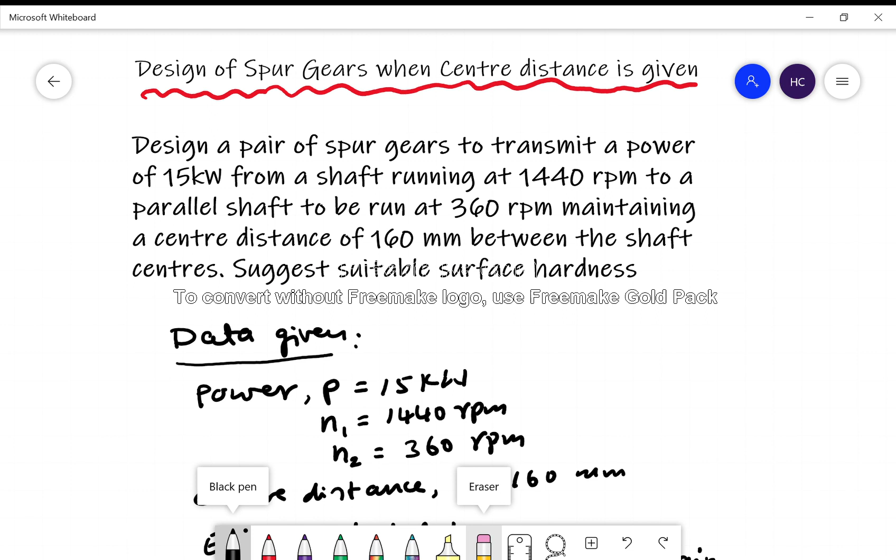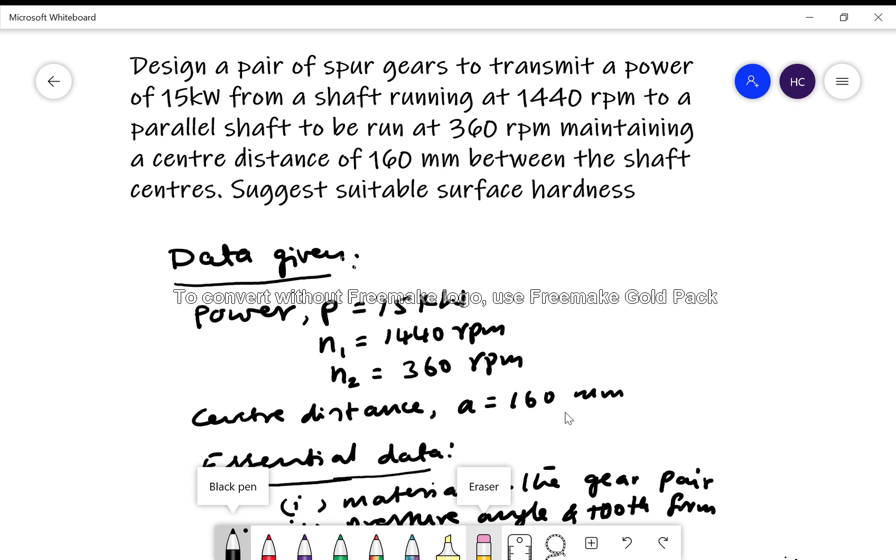Data given. Power P is equal to 15 kilowatt. Speed of pinion N1 is equal to 1440 rpm. Speed of gear N2 is equal to 360 rpm. And center distance A is equal to 160 mm. Center distance A is nothing but D1 plus D2 divided by 2.

So data required: material of the gear pair, pressure angle and tooth form, class of gears, type of load and service condition. Center distance is given. We are not supposed to assume minimum number of teeth, that is teeth on pinion.

So now let us select material for the pinion as cast steel, 0.2% carbon, heat treated. Allowable static stress for this material is sigma D1 is equal to 193.2 Newton per millimeter square from table 12.7 on page 234, design data handbook by Professor K. Mahadevan and Professor K. Balaveera Reddy, 4th edition.

And the gear material we have chosen is cast steel, that is also 0.2% carbon, untreated. So the allowable static stress for which is 138.3 Newton per millimeter squared. It's always better to choose high strength material for pinion. If pinion and gear are made of same material, then pinion is weaker. So hence you have to design based on pinion.

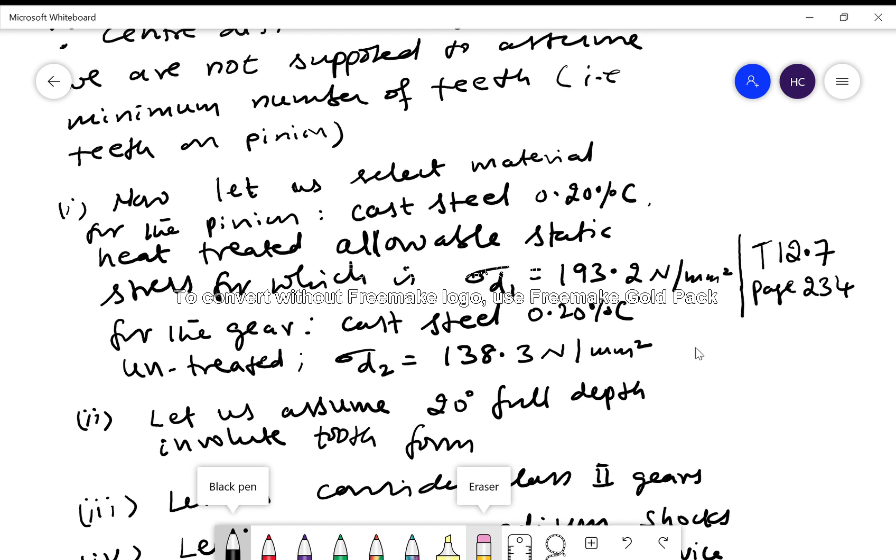So now let us assume 20 degree full depth involute tooth form, and let us consider class 2 gears, and let us assume medium shocks and 8 to 10 hour per day service, for which service factor is 1.5 from table 12.8 page 235.

Sometimes in the examinations they'll give starting torque is greater than rated torque. Say sometimes starting torque is 20% greater than the rated torque, or 50% greater than the rated torque, like that. So sometimes they'll say starting torque, sometimes they say maximum torque. So sometimes maximum torque is 1.5 times the rated torque, like that they give.

So that's 1.5 times, or 20% means 1.2. Okay, so that is nothing but a service factor. So once in the question they mentioned this, you need not take CS once again. Okay, that itself is a CS.

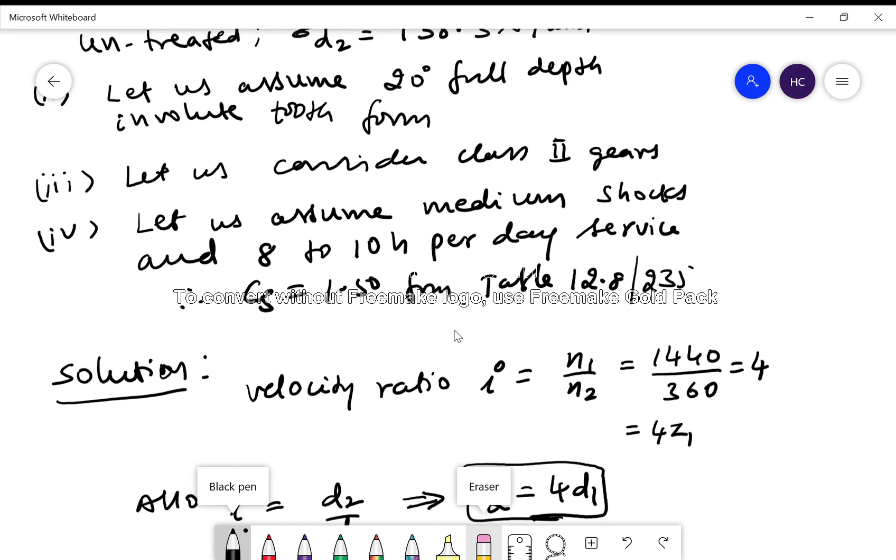Solution. So velocity ratio I is equal to N1 by N2, that's equal to 1440 divided by 360, that's equal to 4. And we have I is also equal to Z2 by Z1. Therefore, Z2 is equal to 4Z1. So in terms of pitch diameters, we have I is equal to D2 by D1. Therefore, D2 is equal to 4 times D1.

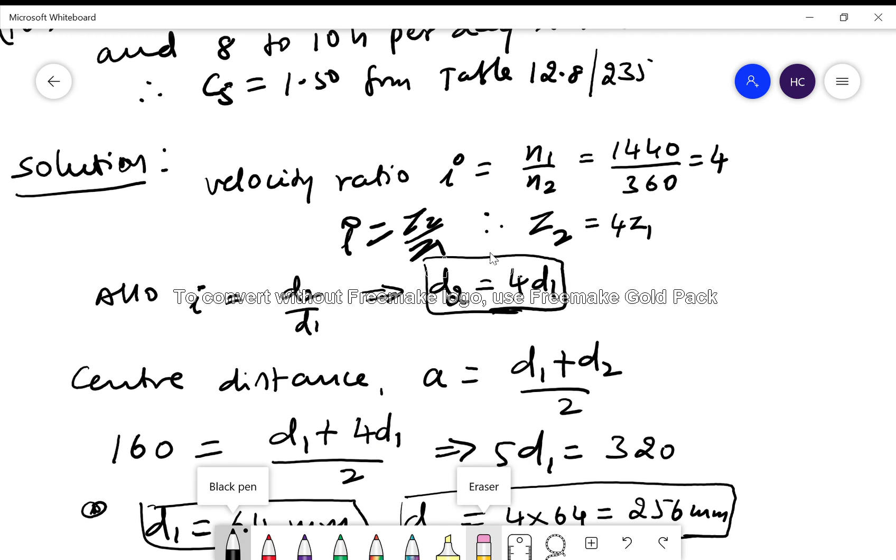Because I is 4. So now center distance is given as A is equal to d1 plus d2 by 2. So for A we have substituted 160 mm, d1 we have written as it is, and for d2 we have substituted 4d1. So now d1 plus 4d1 is 5d1. 5d1 is equal to 160 into 2, that is 320. So from which we obtain d1 is equal to 64 mm and d2 is 4 times d1,

that is 256 mm. Also we know that number of teeth z is equal to d by m, pitch diameter divided by module. So therefore z1 is equal to d1 by m, that is 64 by m. Similarly z2 is equal to d2 by m, that is equal to 256 by m.

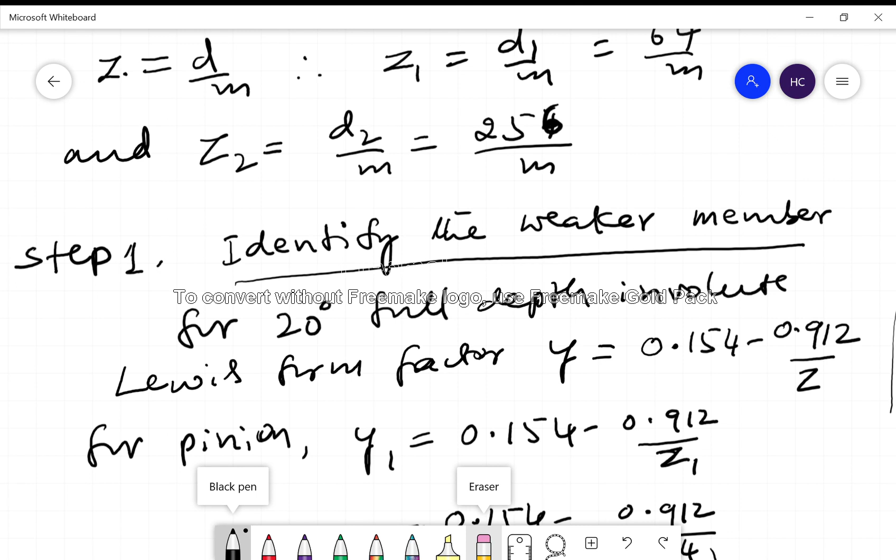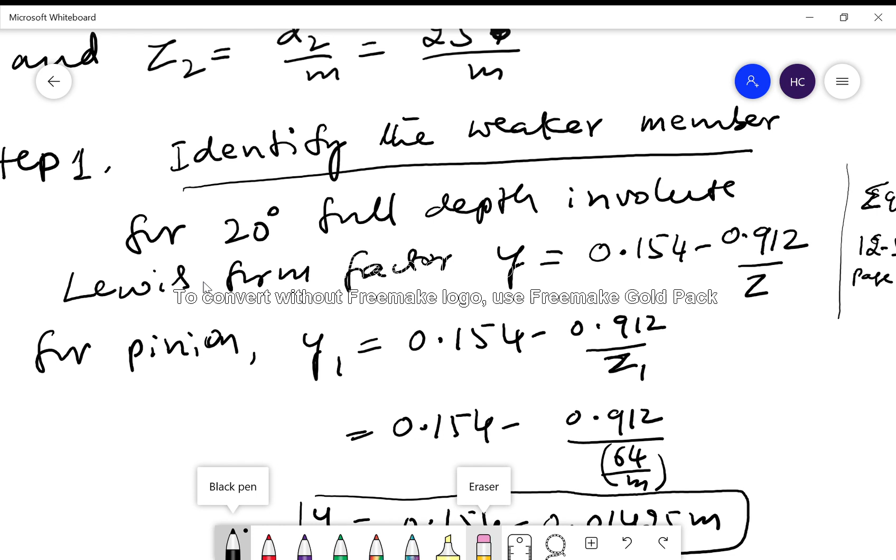So now step 1 is to identify the weaker member. For 20-degree full depth involute system, Lewis form factor y is given as 0.154 minus 0.912 divided by z. For pinion, we use the suffix y1. 0.154 minus 0.912; for z1, we have substituted 64 by m because z is d by m. So we get y1 is equal to 0.154 minus 0.01425 m.

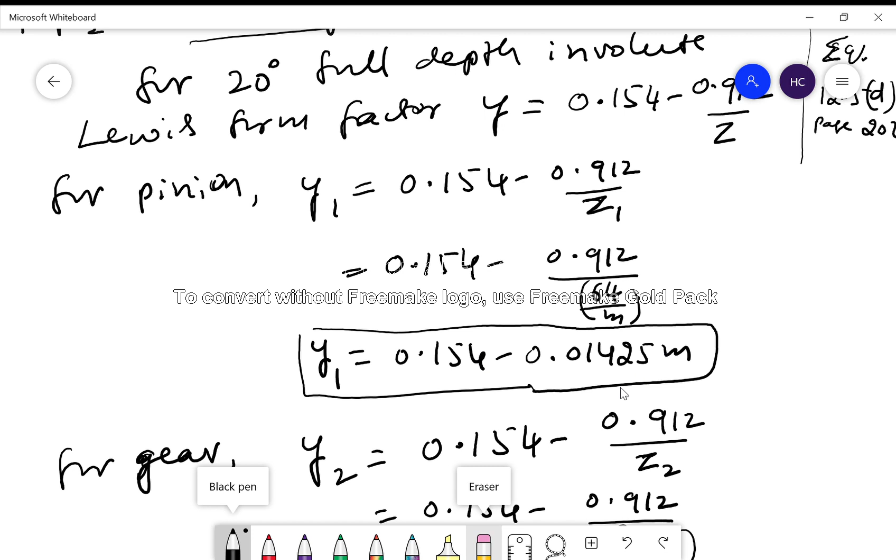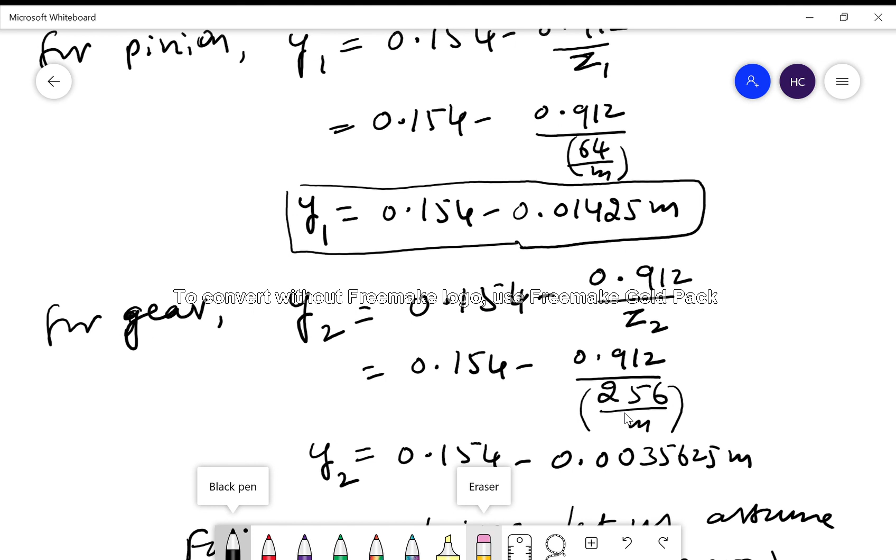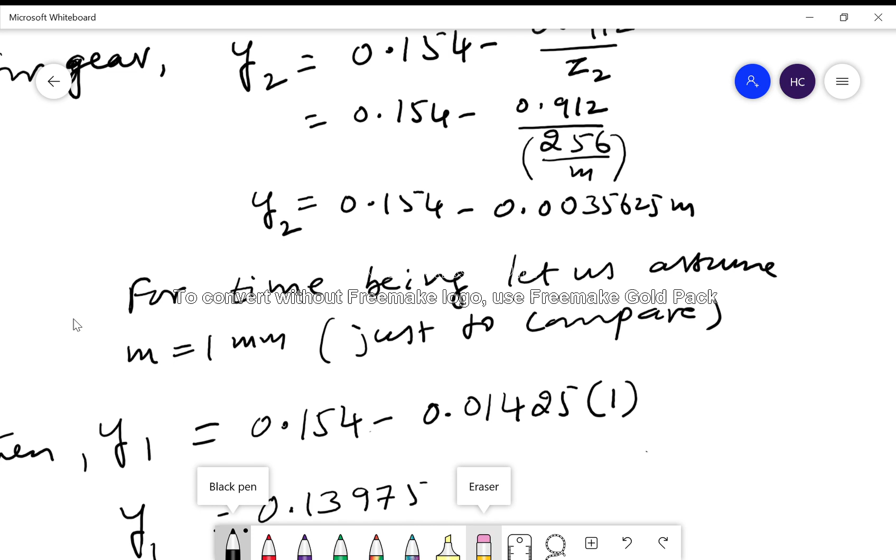For gear, y2 is equal to 0.154 minus 0.912 by z2. For z2 we have substituted 256 by m, that is d2 by m. So now we get y2 is equal to 0.154 minus 0.0035625 m. For time being, let us assume module m is equal to 1 mm. Just to compare, okay, just to identify the weaker member. So let us assume m is equal to 1 mm.

So now after substituting module m is equal to 1 mm, we get y1 is equal to 0.13975 and y2 is equal to 0.1504. So now in order to identify the weaker member, we want sigma d1 y1 and sigma d2 y2. So for sigma d1 y1, sigma d1 is 193.2 and y1 is 0.13975. So we get 26.9997 Newton per millimeter squared.

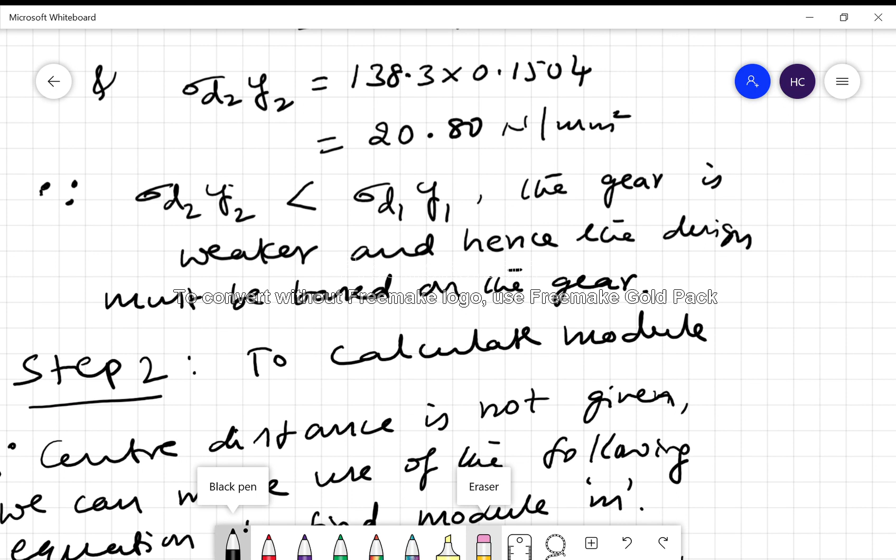For sigma d2 y2, sigma d2 is 138.3, that is allowable static stress for gear material, and y2 is 0.1504, so gives us 20.8 Newton per millimeter squared. So now we see that sigma d2 y2 is less than sigma d1 y1. Since sigma d2 y2 is less than sigma d1 y1, the gear is weaker and hence the design must be based on the gear.

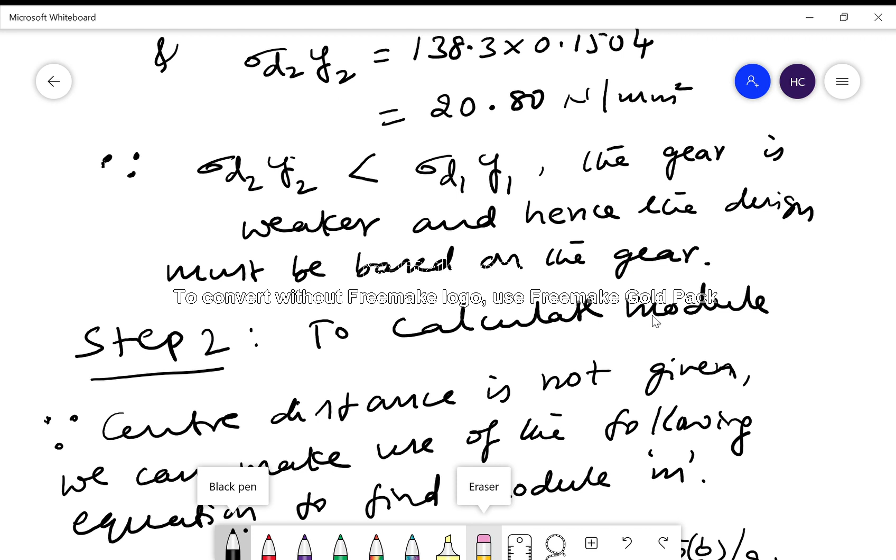Step 2, to calculate module. Since the center distance is not given, we can make use of the following equation to find module m. That is, m is equal to square root of Ft by sigma d Cv k into capital Y, equation 12.5b, page 204.

So here Ft is 1000 P Cs divided by V. So in order to find velocity, we have to make use of this equation. Because gear is weaker, pitch diameter of the gear and speed of the gear we have considered here. V is equal to pi d2 N2 by 60,000.

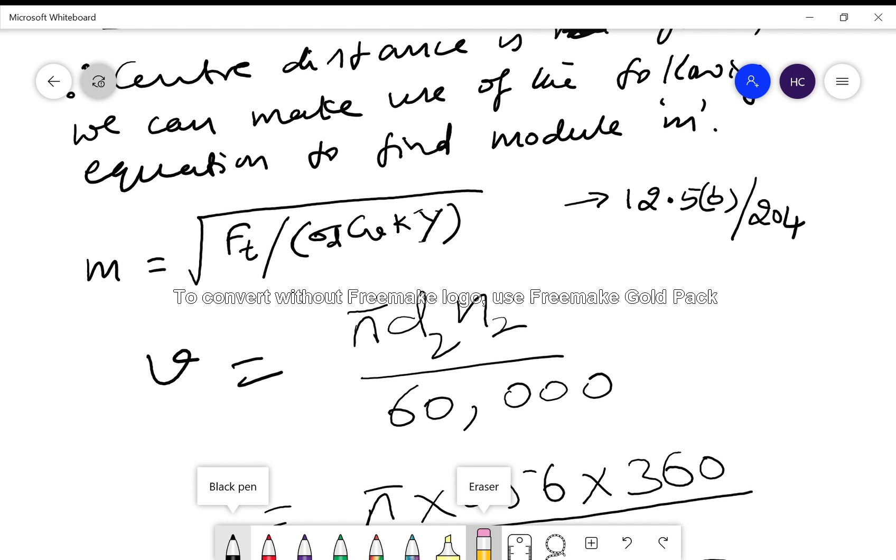Substituting d2 is 256 and n2 is 360, we get velocity V is equal to 4.825 meter per second. This velocity is less than 8 meter per second. Then using Barth's equations, we get velocity factor Cv is equal to 3.05 divided by 3.05 plus V, equation 12.6a, page 205. Since velocity is less than 8 meter per second, we are making use of this equation. So now we get Cv is 0.3873. For V, we have substituted velocity 4.825 meter per second.

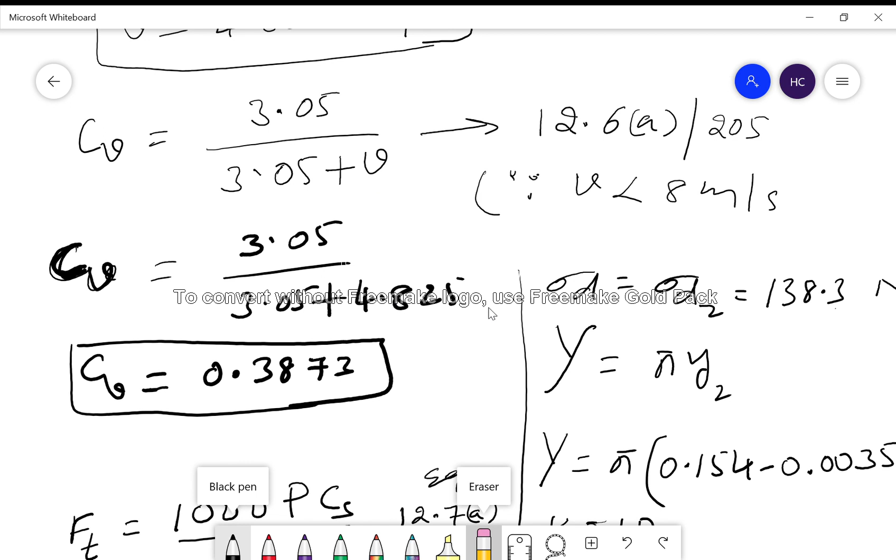Now Ft is 1000 P into Cs divided by V, equation 12.7a, page 205. Thousand into power P is 15, Cs is 1.5, we have assumed that. Velocity V 4.825. So we calculate 4663.21 Newton as Ft value.

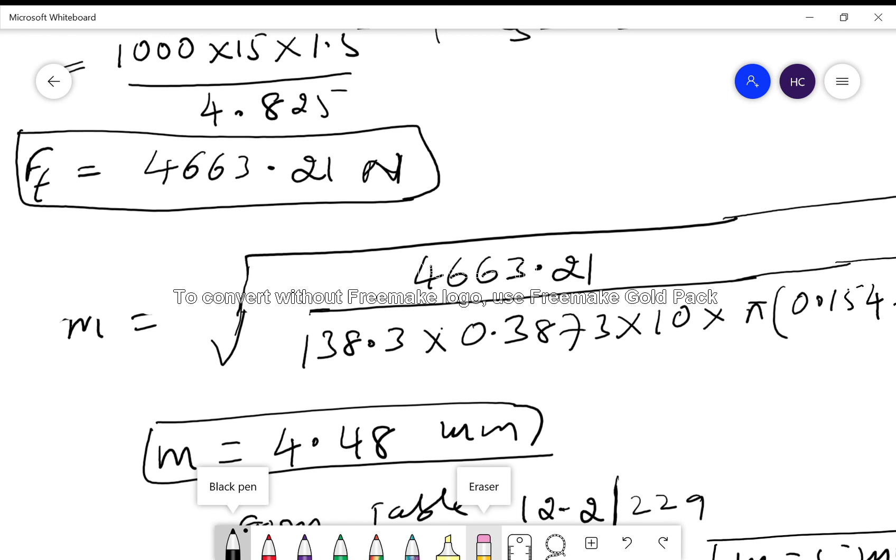Now, module M is given by Ft divided by sigma d Cv K into capital Y. So Ft we have substituted 4663.21. Sigma d is nothing but sigma d2, that is 138.3 Newton per millimeter square, and Cv 0.3873. K we have taken 10 because K is nothing but a ratio of B by M. So K is B by M. Therefore, K varies from 9.5 to 12.5. So we have taken K as 10. That's why we have substituted K is equal to 10.

Sigma d2 is 138.3 and capital Y is pi into small y. Small y is 0.154 minus 0.0035625 m. That is, y is nothing but y2 here in this case. Y2 is corresponding to the gear and Cs is 1.5. So now substituting those values here, we obtain module M is equal to 4.48 mm.

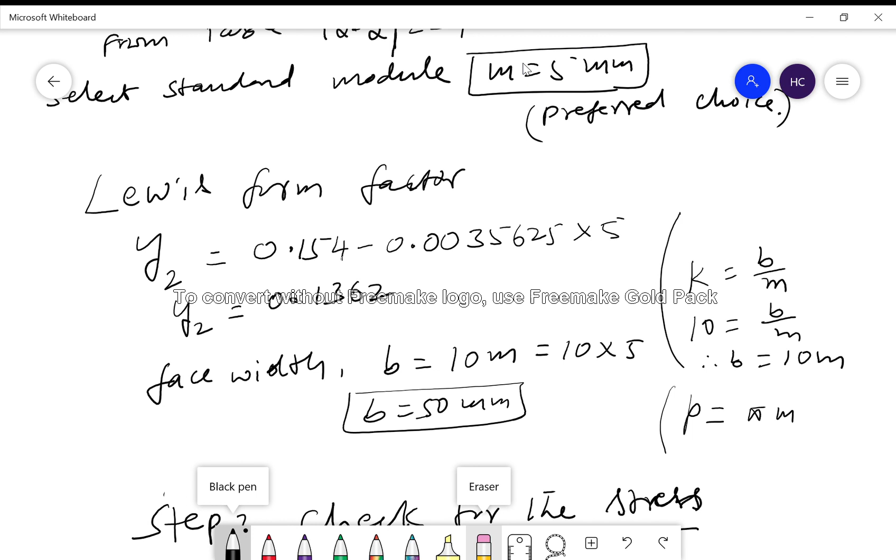Now find out Lewis form factor after substituting M value here. So you get y2 is equal to 0.1362. In table 12.2 page 229 we also have module 4.5 mm, which is greater than the calculated value 4.48, but it's preferred to take 5 mm only.

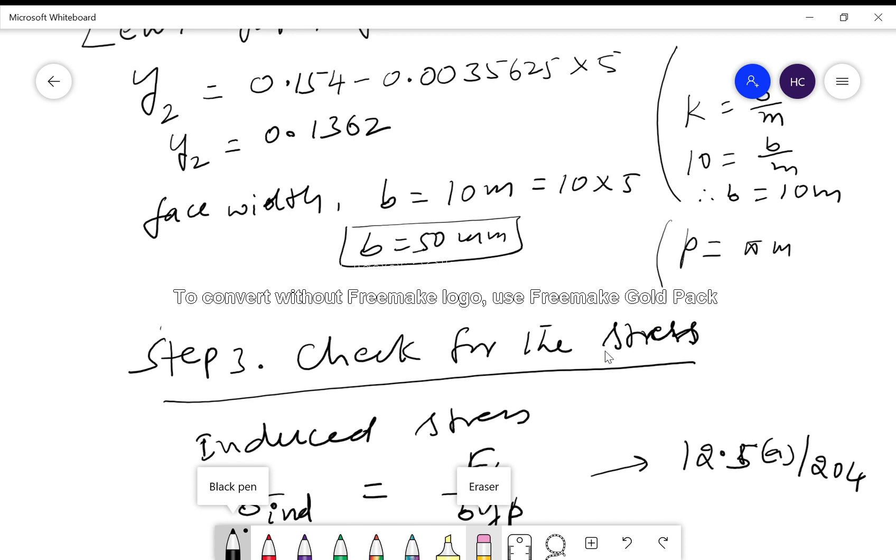It's a preferred choice. So now face width B is equal to 10 times the module, that is 10 into 5, B is equal to 50 mm, because K is equal to B by M, and K we have taken 10, therefore B is equal to 10 times module. And small p is the circular pitch, that is pi into M. Now step 3, check for the stress. Induced stress, sigma induced, is equal to Ft divided by B small y into small p, equation 12.5a, page 204.

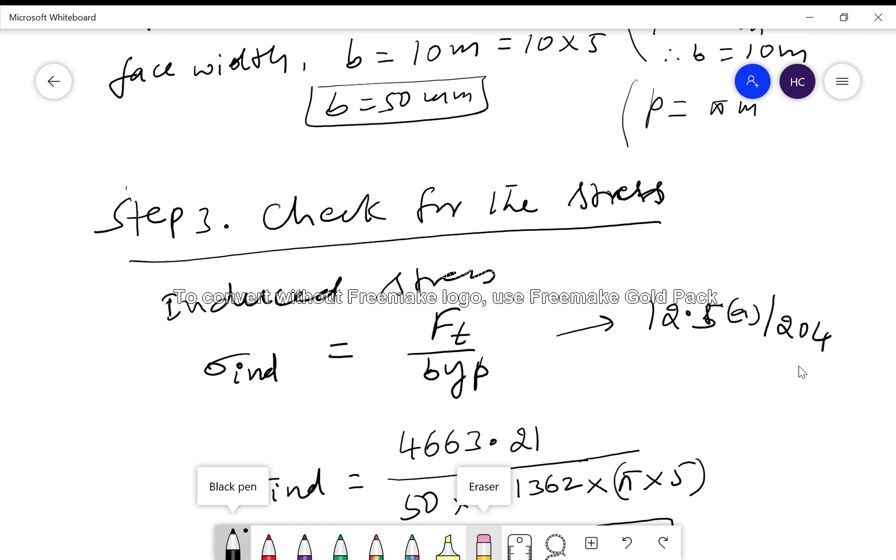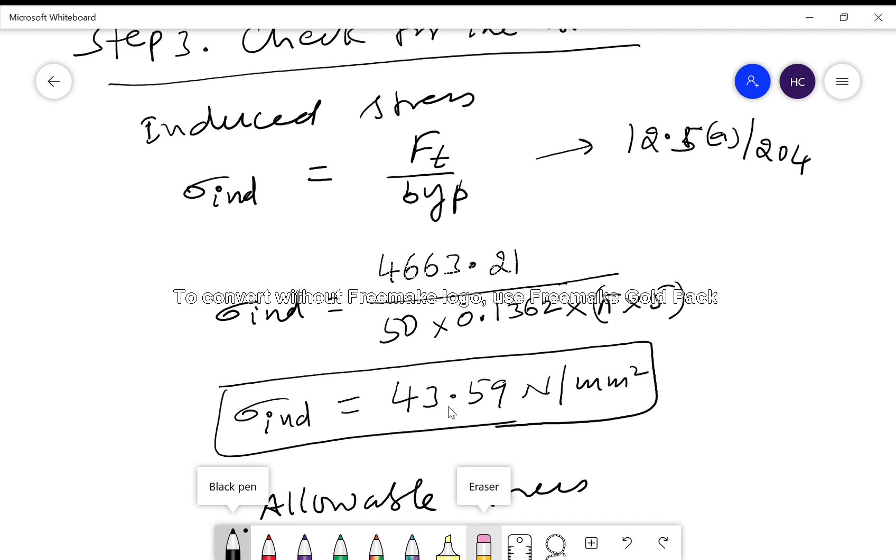So now we have substituted corresponding values and we obtained induced stress sigma induced is equal to 43.59 Newton per millimeter square. Now we need to calculate allowable stress. Sigma allowable is equal to sigma d into Cv. Sigma d here is nothing but sigma d2, that is for gear. So allowable static stress for gear material is 138.3 Newton per millimeter square, and Cv we have already calculated, 0.3873. So allowable stress is 53.56 Newton per millimeter square.

The allowable stress is 53.56 Newton per millimeter square. The induced stress is 43.59 Newton per millimeter square. Since induced stress is less than allowable stress, that is 43.59 is less than 53.56 Newton per millimeter square, the design is satisfactory. So let us find out FOS: sigma allowable divided by sigma induced, 53.56 divided by 43.59. So we get factor of safety is equal to 1.23.

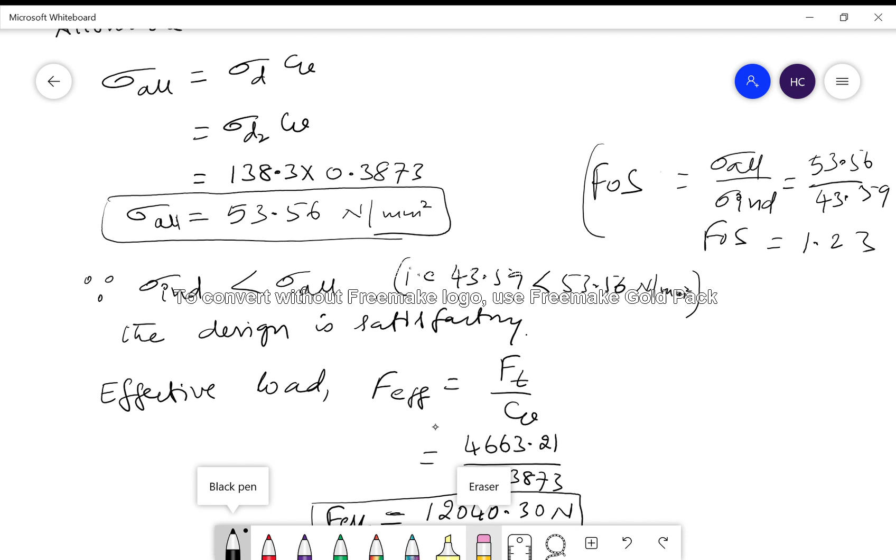So now find out effective load or effective force. F effective is equal to Ft by Cv. Ft is 4663.21 Newton, Cv is 0.3873. So F effective is 12,040.30 Newton. Next, calculate dynamic strength.

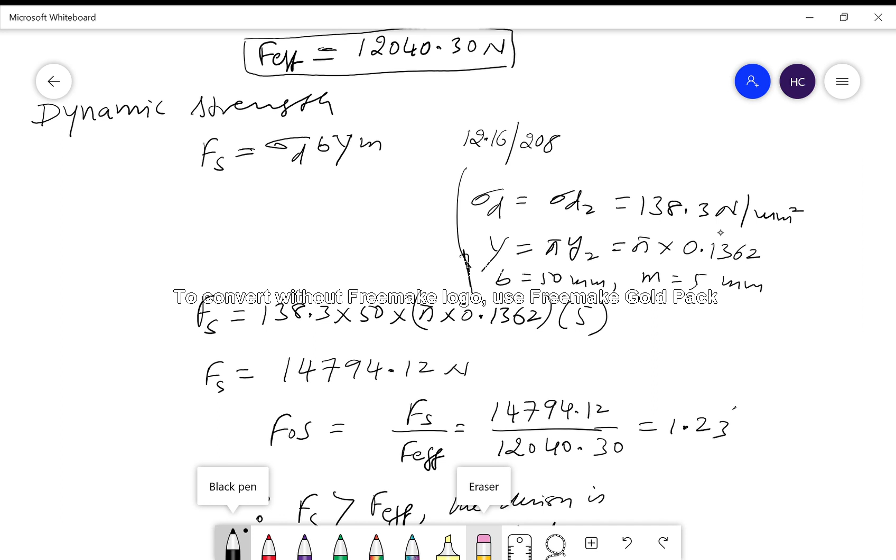Fs is equal to sigma d b capital Y into M. Sigma d is nothing but sigma d2, that's 138.3 Newton per millimeter square. This dynamic strength equation is 12.16, page 208. Capital Y is pi y2, so substitute y2 is 0.1362. After substituting, we obtain dynamic strength as 14,794.12 Newton. So factor of safety is dynamic strength divided by effective load. That gives us 1.23, same as the factor of safety obtained from the allowable stress and induced stress ratio. Since the dynamic strength is greater than effective force, the design is satisfactory.

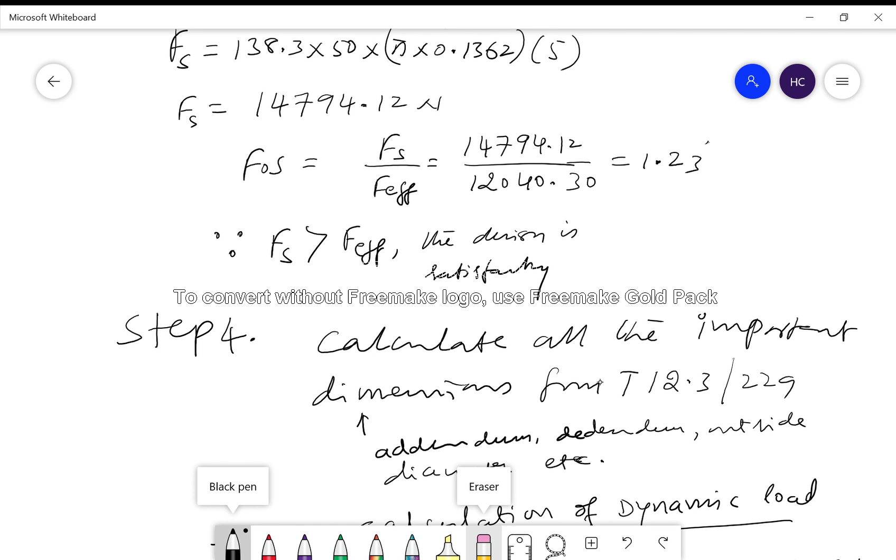Step 4. Calculate all the important dimensions from table 12.3, page 229. Important dimensions like addendum, dedendum, outside diameter, etc.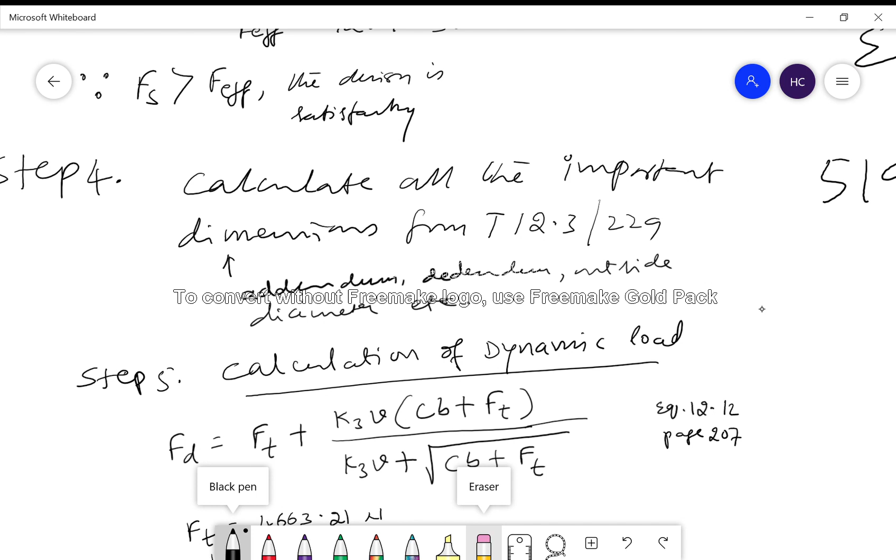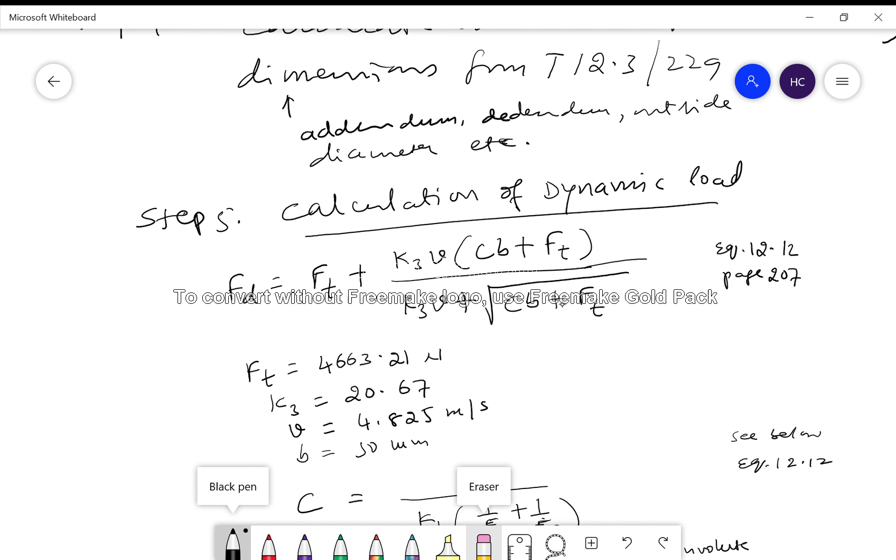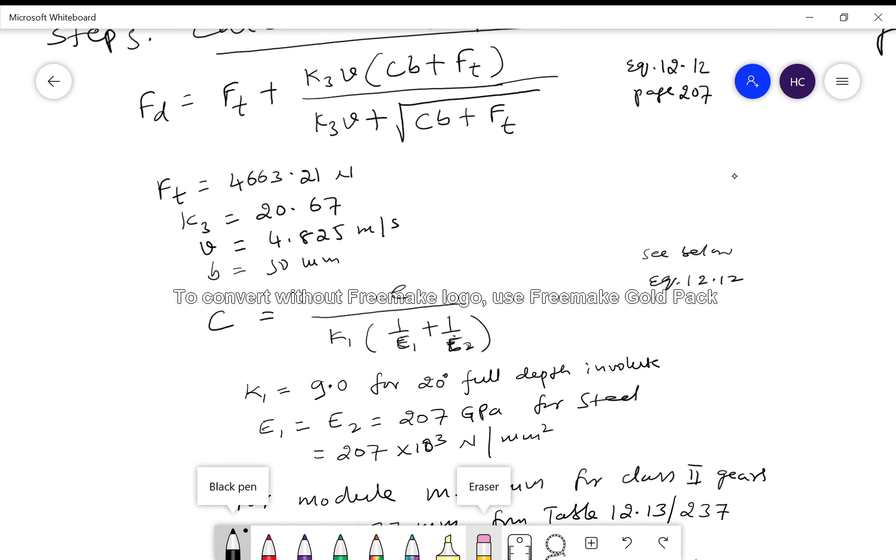Next, step 5. Calculation of dynamic load. Dynamic load Fd is equal to Ft plus K3V into (C into B plus Ft) divided by K3V plus square root of (C into B plus Ft). Equation 12.12, page 207.

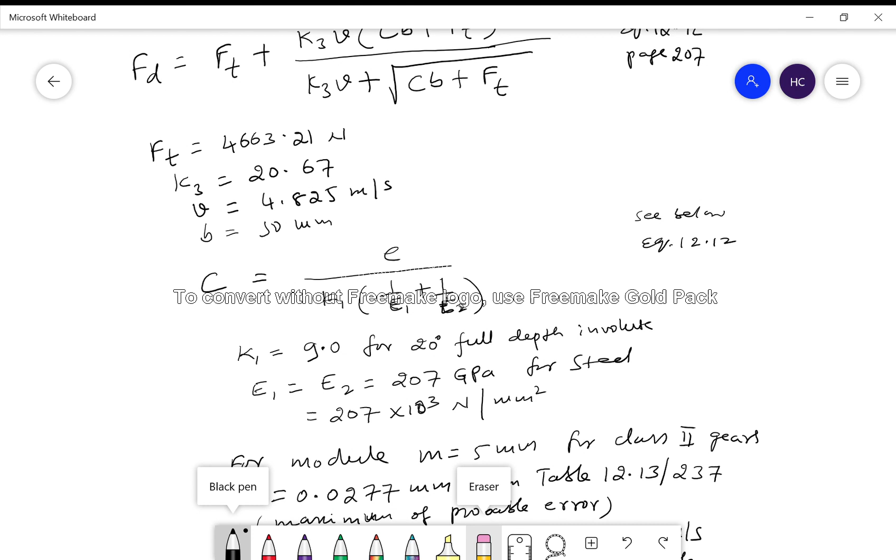So now we know that Ft is 4663.21 Newton, tangential force or tangential load. K3 is equal to 20.67 for SI units, V is 4.825 meter per second, and B is 50 mm. So the only unknown is C here. So C can be calculated by using this equation or from table 12.12.

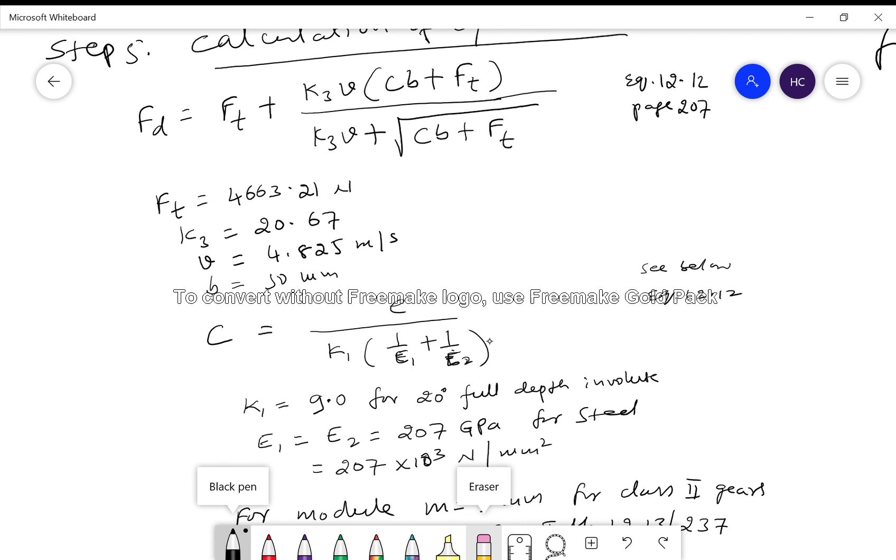So C is equal to E divided by K1 into (1 divided by E1 plus 1 divided by E2). E1 and E2 are moduli of elasticity of pinion and gear materials respectively. Here we have taken steel for both pinion and gear, so modulus of elasticity is 207 GPa, that is 207 into 10 to the power of 3 MPa or Newton per millimeter square. And K1 is 9 for 20 degree full depth involute, because we have assumed a 20 degree full depth involute tooth form. So now we need to find out error.

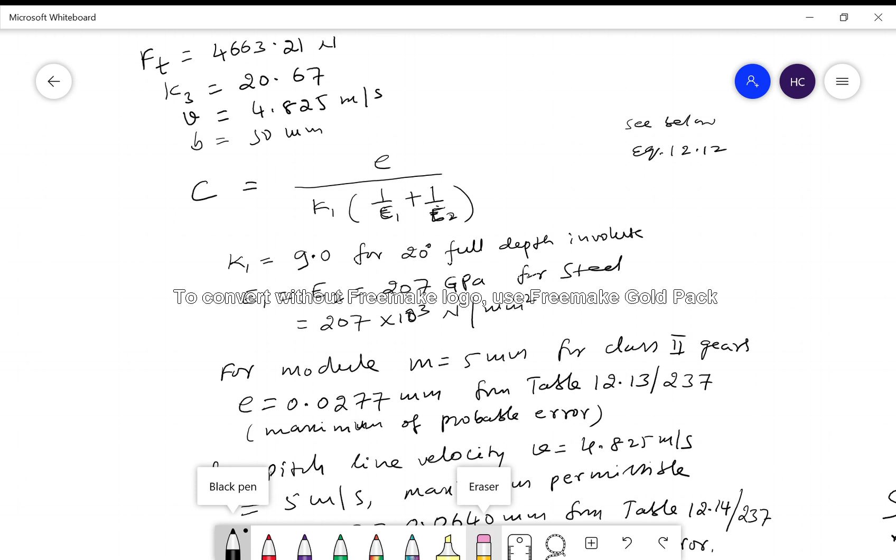We have assumed class 2 gears. For module M equal to 5 mm and class 2 gears, error E is equal to 0.0277 millimeter from table 12.13, page 237. That is the maximum probable error. We also need the permissible error for pitch line velocity V equal to 4.825 meter per second. The table doesn't have exactly 4.825, which is nearly equal to 5 meter per second, so the maximum permissible error E is 0.0640 millimeter, from table 12.14, page 237.

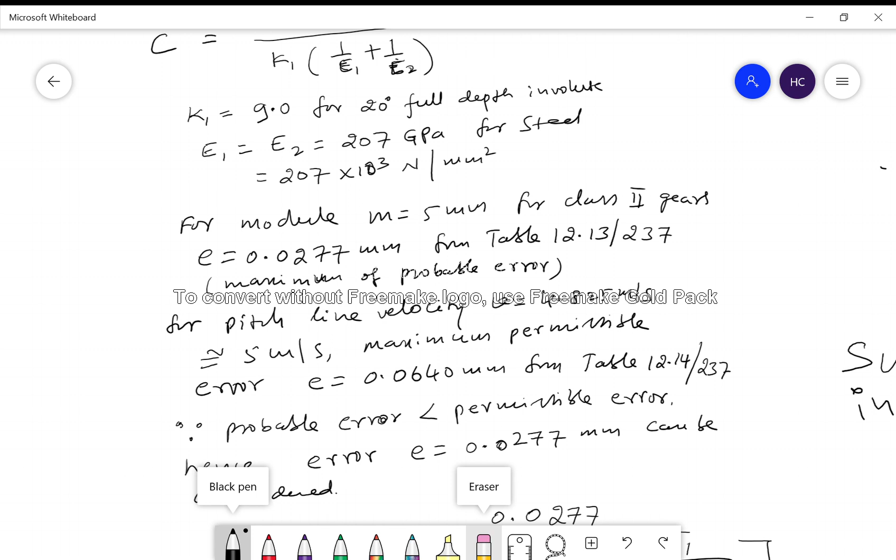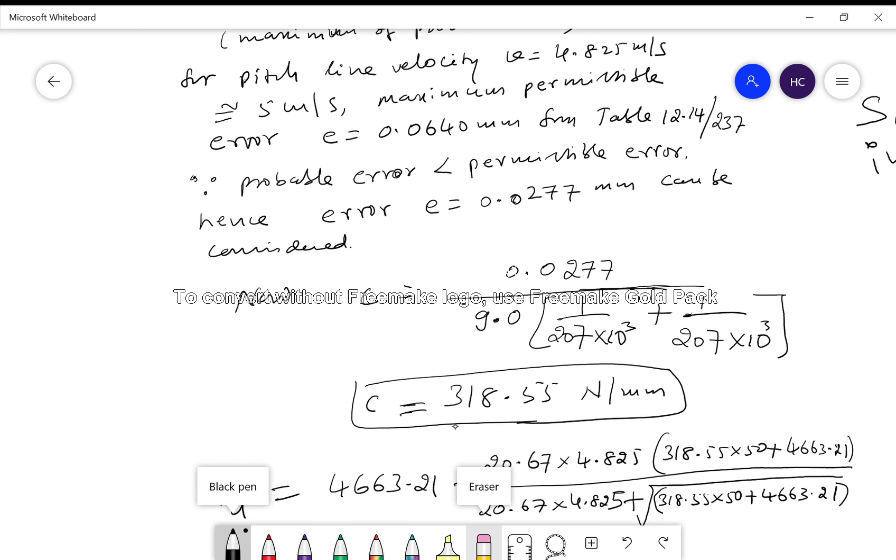Since probable error is less than permissible error, we take E equal to 0.0277 mm. So now C is equal to 0.0277 divided by 9 into (1 by 207 into 10 to the power of 3 plus 1 by 207 into 10 to the power of 3). That gives C equal to 318.55 Newton per mm. After substituting all these values, Ft, K3, V, C, B, and Ft, we get dynamic load Fd equal to 13,106.21 Newton.

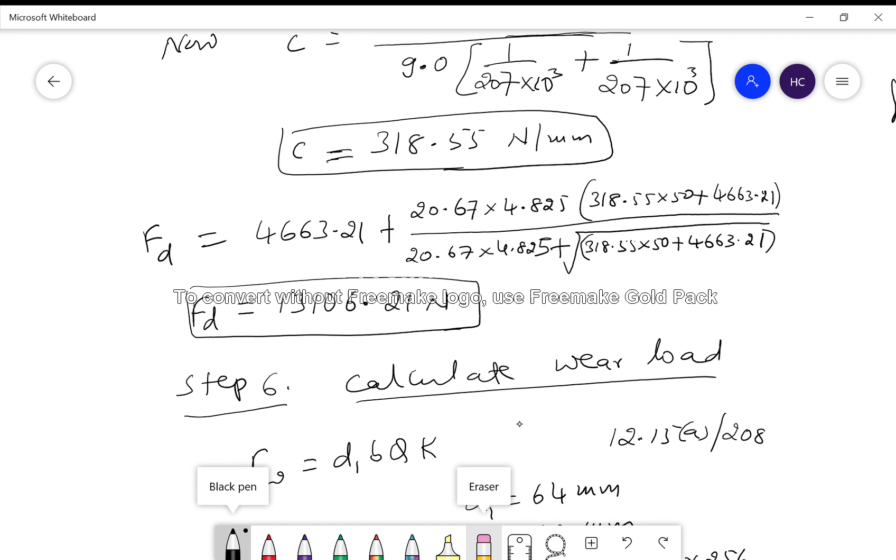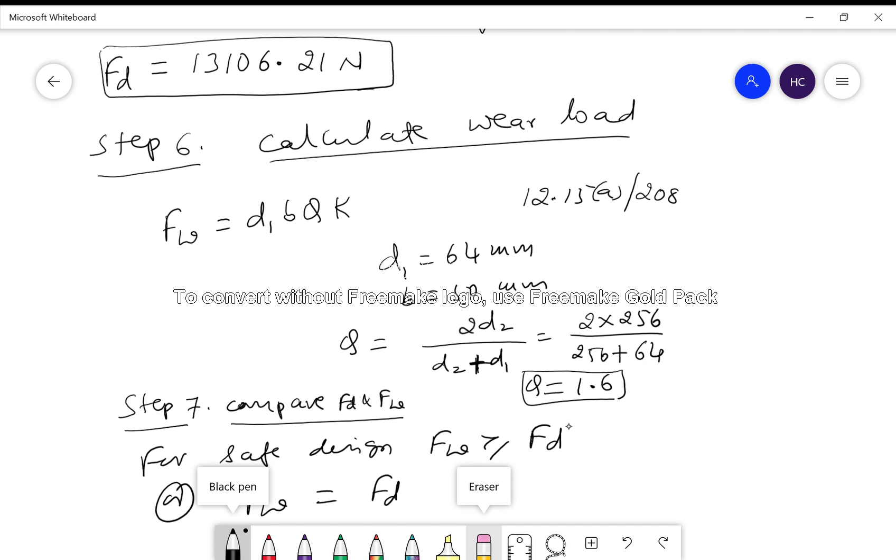Step 6. Calculate wear load or limiting load for wear, given by equation 12.13a, page 208. Fw is equal to d1 b Q K. d1 is 64 mm, b is 50 mm, and ratio factor Q is 2d2 by d2 plus d1, that is 2 into 256 divided by 256 plus 64, so Q is 1.6. Now step 7, we compare dynamic load with wear load. For safe design, wear load must be greater than or equal to dynamic load. So let us consider Fw equal to Fd in order to find out K.

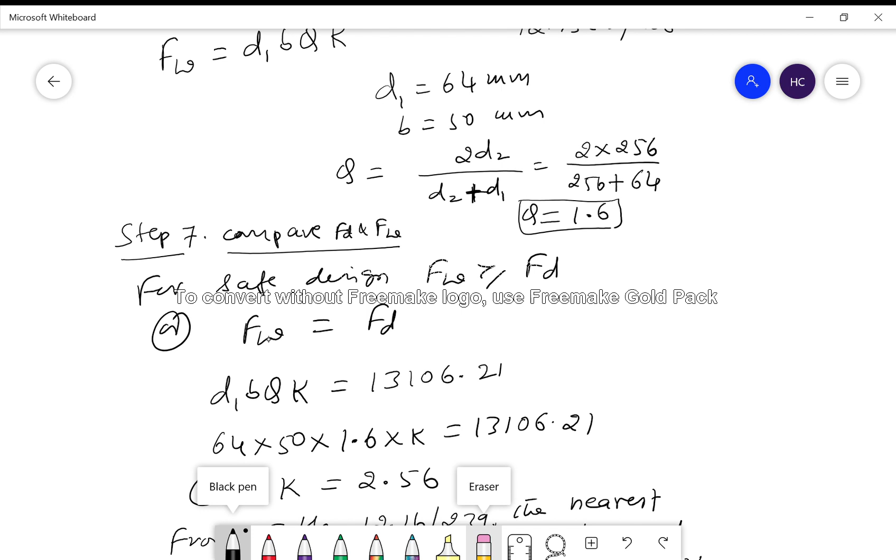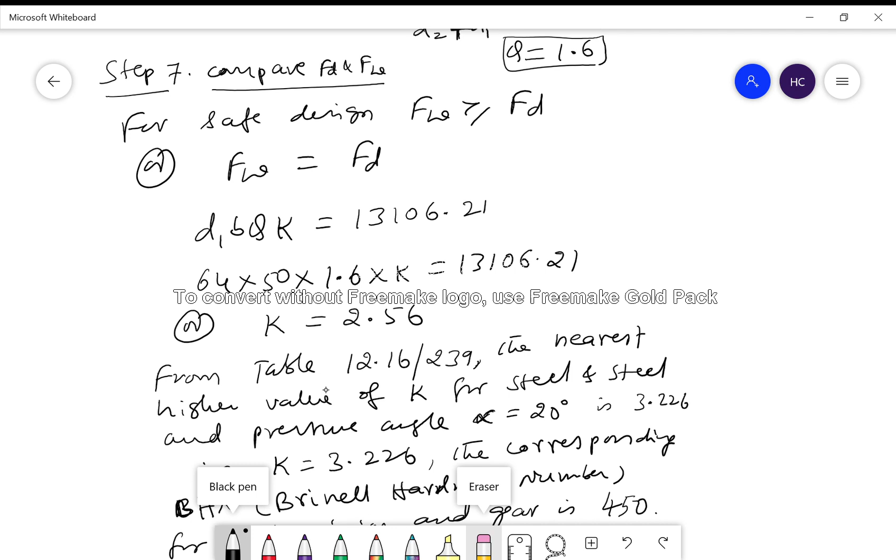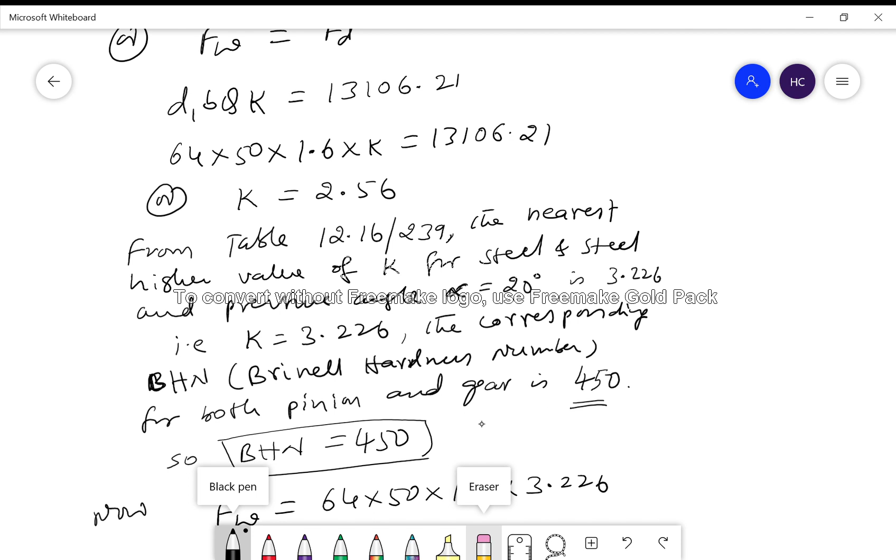Substituting D1 64 mm, B 50 mm, Q 1.6 and Fd 13,106.21, we get K equal to 2.56. But from table 12.16, page 239, the nearest higher value of K, the load stress factor for steel pinion and steel gear with pressure angle 20 degree, is 3.226. The corresponding Brinell hardness number, BHN, for both pinion and gear is 450. So BHN is 450 and K is 3.226.

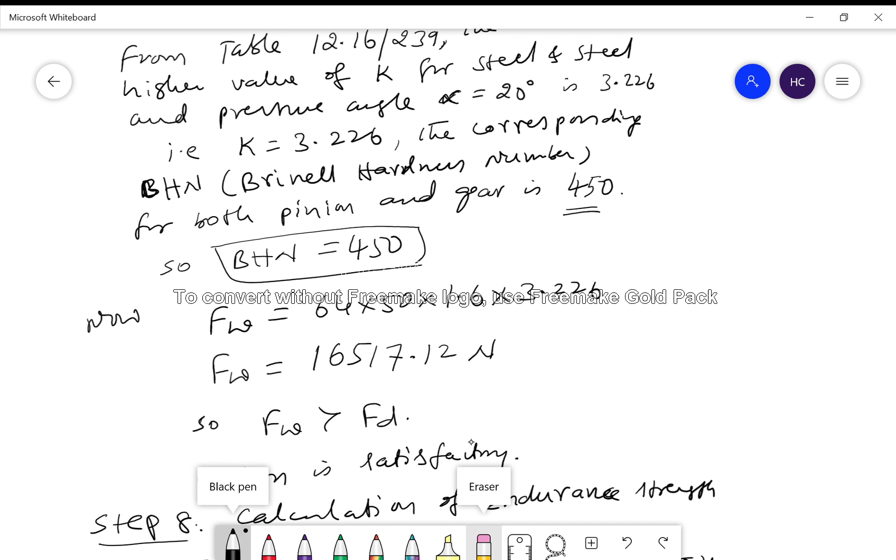Now we find Fw by substituting K as 3.226. So we get wear load Fw of 16,517.12 Newton. Since Fw is greater than Fd, the design is satisfactory.

Next, step 8, calculation of endurance strength. Endurance strength Fen is equal to sigma En B Y, capital Y, into M. This equation is equation 12.13a, page 207. Sigma En is the endurance limit. From table 12.15, page 238, for steel with BHN 450, endurance limit is 686.5 Newton per millimeter squared.

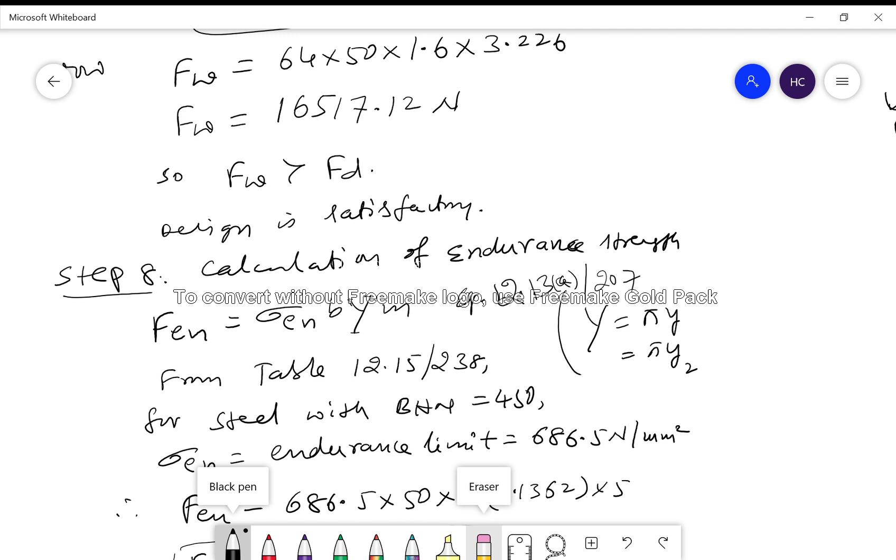Capital Y is nothing but pi into Y, here pi into Y2, because we are considering design based on gear. Substituting these values, with M the module of 5 mm, we get Fen equal to 73,435.75 Newton.

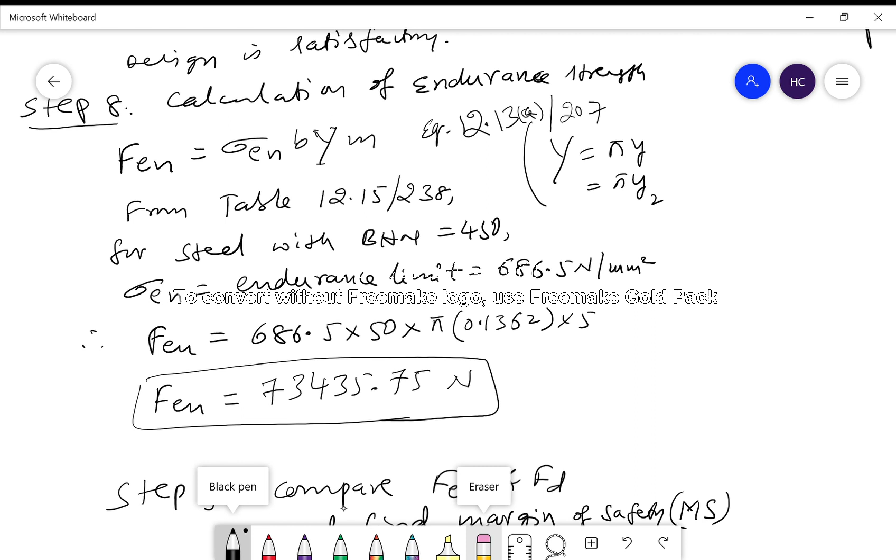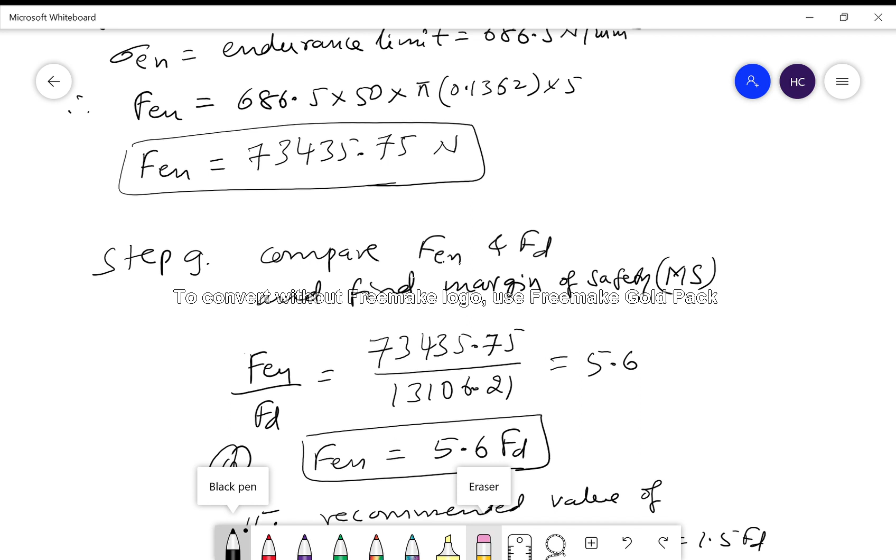Now step 9, we compare Fen and Fd, endurance strength with dynamic load, and find the margin of safety MS. Fen by Fd is 73,435.75 divided by 13,106.21, both in Newton, giving 5.6. Therefore Fen is 5.6 times Fd. The recommended value for shock loads is Fen equal to 1.5 times Fd. Since the obtained value is greater than the recommended value, design is satisfactory.

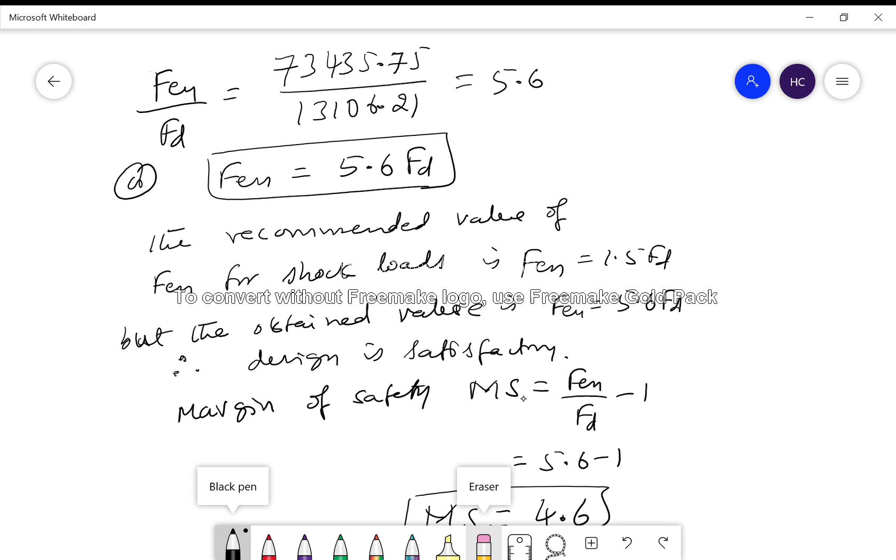The margin of safety MS is given by Fen by Fd minus 1. That is 5.6 minus 1, giving margin of safety MS equal to 4.6, which is greater than the required margin of safety of only 0.5. So now we got 4.6.